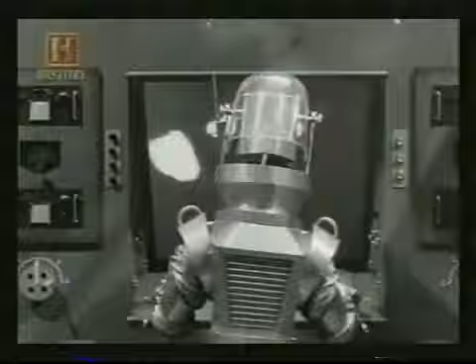Con crear una máquina a su propia imagen, que sea inteligente, fuerte y obediente. Más allá de las ideas fantásticas, se encuentra una sorprendente agilidad y una precisión sin paralelos. Desde las primeras maravillas mecánicas hasta la aterradora ciencia ficción y la sorprendente realidad de nuestros días, esta es la extraordinaria historia de los robots.

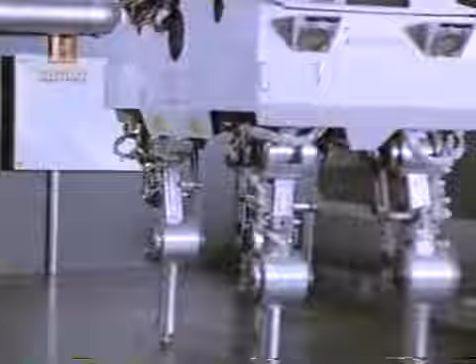Estos son los robots del siglo XX. Magníficas máquinas que han salido de las páginas de la ciencia ficción para adentrarse en nuestras vidas. Actualmente muchos robots trabajan para nosotros. En las fábricas, estos obreros de acero laboran sin descanso y desempeñan tareas de precisión, guiados por sentidos muy desarrollados, como la vista y el tacto.

Otros robots se aventuran valientemente en ambientes hostiles, desempeñando trabajos desagradables, demasiado peligrosos para ser realizados por el hombre. Los robots también son construidos para entretenernos y asombrarnos. Cada vez más se parecen a sus creadores y actúan como ellos.

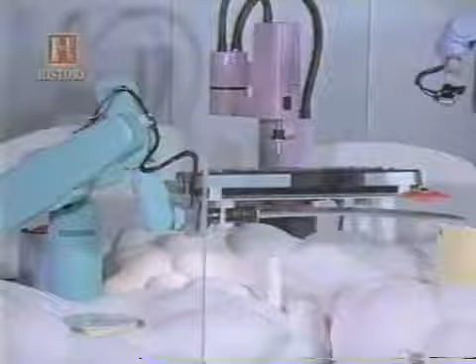A medida que los científicos continúan creando robots más inteligentes y ágiles, se hace más claro que estas inteligentes máquinas tendrán un profundo efecto en nuestro futuro.

Pensamos en los extraordinarios avances en la robótica como un producto de los recientes adelantos en la tecnología y la computación. A pesar de que la palabra no ingresó en nuestro vocabulario sino hasta los años 20, estos robots han estado evolucionando durante miles de años, a medida que el hombre se ha esforzado por crear máquinas a su propia imagen, para trabajar, entretener y para que permanezcan como servidores y no se conviertan en amos.

La primera criatura con aspecto de robot data de hace aproximadamente 5000 años, cuando los sacerdotes manipulaban fraudulentamente estatuas religiosas con movimiento en los labios y tubos parlantes para impresionar a sus asombrados seguidores.

As part of religious practice, going back thousands and thousands of years, there's normally been some kind of oracle, some sort of seer, that gives you predictions about the crops or the weather or whether the king will die. And these figures had to come at you in some sort of secretive, magical way. And the Egyptians did this with an Anubis, which is kind of a wolf-like face with an articulated jaw. The articulated jaw could be manipulated by the priest behind the Anubis, and then the priest could talk through a tube in through the Anubis's mouth.

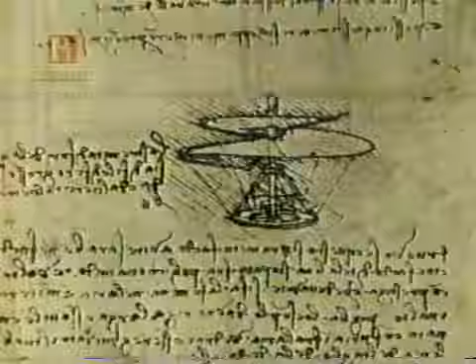En el siglo XVI, Leonardo da Vinci llenó sus libros con principios mecánicos que posibilitaban la creación de autómatas, y dijo haber creado un león mecánico para el rey Luis XII.

En 1580, el rabí Judah Loew creó el legendario Golem para proteger a los judíos de Praga. La historia dice que construyó una figura de barro extraído del río Moldava y le dio vida. Sin embargo, con el tiempo el golem sufrió un ataque de locura y tuvo que ser destruido. Por supuesto, gran parte de la historia es mito, pero el tema se convirtió en elemento permanente durante siglos de los cuentos populares sobre robots.

Para el siglo XVIII, la tecnología de los relojes y cajas musicales había sido perfeccionada, y los inventores y científicos se inspiraron en estas intrincadas máquinas.

It's hard for us to imagine how amazing it was when somebody came up with a clock that could tell time by the minute. And then, what else could a machine do, a mechanical device? And the imagination just went wild.

El artesano suizo Pierre-Jacques Droz y otros utilizaron estas técnicas para construir complejos autómatas que ejecutaban instrumentos musicales y realizaban pinturas. Estas ingeniosas máquinas operaban con levadores de bronce finamente labrados. Con el cambio de los levadores en los dispositivos se alteraban los movimientos del autómata, lo cual dio origen a las primeras máquinas programables.

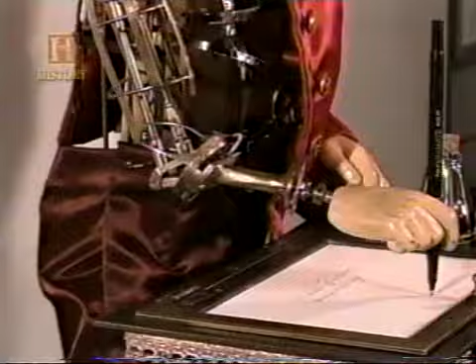This automaton is particularly interesting in that it has the largest vocabulary of any of the machines that survive, and we think the largest one of any that was ever built. It knows how to write 3 poems and can draw 4 pictures.

One of the poems is in English, but 2 of them are in French, because this machine was designed to travel all over Europe to sell tickets to pay for itself.

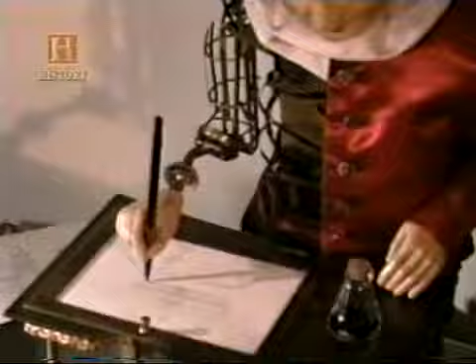When we got the machine rebuilt and started reading out from its program, the last poem that it writes says down at the bottom of the poem, écrit par l'automate de Maillardet, written by Maillardet's automaton.

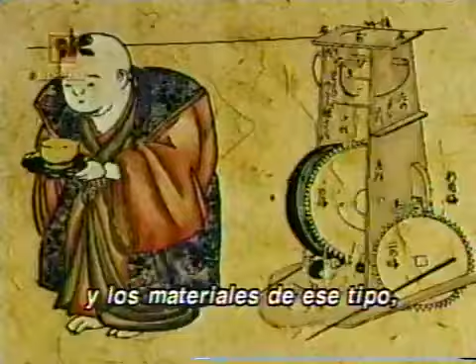What's amazing about the mechanisms is before the Japanese had total control over flexible metals and things of that kind, they made use of bamboo. They made the first walking dolls completely out of bamboo, including the springs. The springs were bamboo springs.

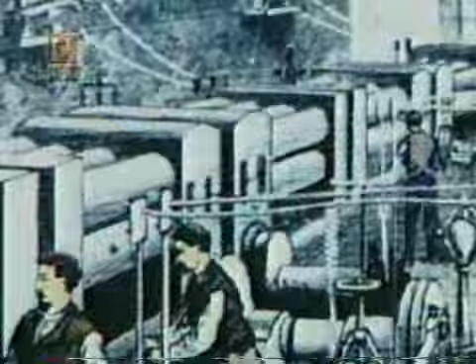Pero esta era la época de la electricidad. El chispazo que trajo el monstruo de Frankenstein a la vida estaba entonces dando vida a autómatas realistas.

En 1876, una banda automática de tamaño real interpretó un número para la entusiasmada audiencia.

Para finales de 1800, Thomas Edison utilizó la tecnología desarrollada para su nuevo fonógrafo con el fin de producir muñecas parlantes que cantaban María tenía un corderillo. El popular invento de Edison puso en marcha una nueva industria de juguetes parlantes.

Entretanto, George Moore exhibía la primera máquina bípeda. Su hombre de hojalata caminaba en círculos impulsado por un motor a vapor de medio caballo de fuerza. La visión de crear robots con forma humana estaba cada vez más cerca de la realidad.

Durante el siglo XX, los escritores y directores cinematográficos de todo el mundo continuaron con el tema de las máquinas fuera de control. En 1920, el director italiano André Deed creó una idea extraordinariamente avanzada para un robot en su film L'uomo meccanico, el hombre mecánico.

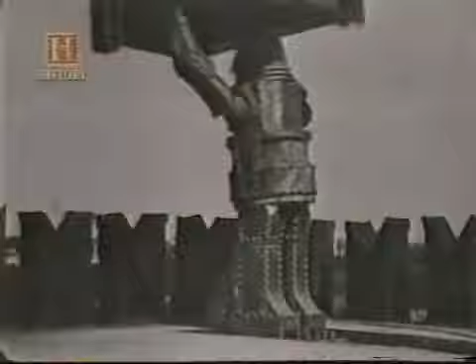1921 trajo otro acontecimiento. El dramaturgo checo Karel Čapek escribió Los robots universales de Rossum, RUR. Este fue el primer uso de la palabra robot, que Čapek derivó de la palabra checa robota.

Robota is the Czech word for extremely hard labor, basically slave labor. The primary characters in RUR were robot workers, machines made to work extremely hard, and the play involved them being exploited mercilessly by the factory owners, and eventually they revolted and destroyed humanity. RUR did set a tone for how the West at least views robots.

Fue entonces cuando en 1926 la película clásica de Fritz Lang, Metrópolis, se convirtió en un éxito internacional al mostrar temas similares a los de RUR.

Metropolis was the 1926 masterpiece by Fritz Lang, which took place in the year 2026, exactly 100 years from when the film was actually made. And you had the beautiful city, all the beautiful people, the beautiful architecture and everything, but really underneath the city you had these oppressed workers who were really responsible for all this lavish lifestyle.

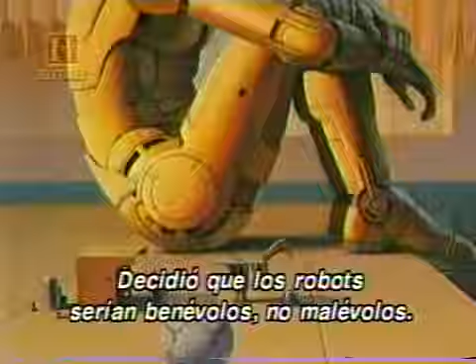They are: 1, a robot may not harm a human being, or through inaction allow a human being to come to harm. 2, a robot must obey orders given it by a human being, except where that would conflict with the first law. 3, a robot must protect its own existence, except where that would conflict with the first and second laws. He decided that robots should be benevolent, not malevolent.

Las máquinas de Asimov dieron origen a nuevos robots en la literatura y las películas de ciencia ficción de principios de los años 50.

This is no offense, but you are a robot, aren't you? That is correct, sir. For your convenience, I am monitored to respond to the name Robbie.

You could really see the 3 laws of robotics demonstrated in Forbidden Planet. And there's this one scene in particular where Morbius tells Robbie to fire a weapon at the commander, and Robbie just freezes, and he has this complete meltdown.

You see, he's helpless, locked in a sub-electronic dilemma between my direct orders and his basic inhibitions against harming rational beings. Cancel.

El Planeta Prohibido hizo de Robbie el Robot una estrella cinematográfica que inspiró a una generación de creadores de robots, a pesar de que fue solo un modelo construido para una película.

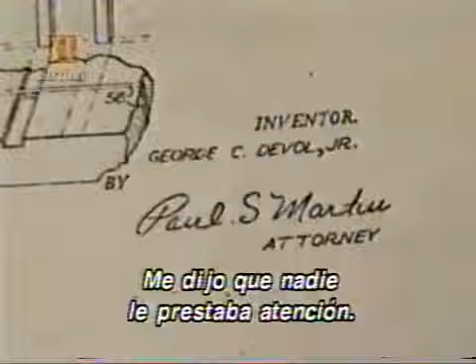We got talking in a corner, and I think we also got into our cups. Talking about it, I said, gee, that sounds like a very good idea. I think the patent makes sense to me. What are you doing with it? And he said, well, no one's paying any attention to me. So I said, let me have a crack at it. Let me see if I can't find the financing. And in the cold gray dawn with a hangover, it still looked like a pretty good idea.

Ambos hombres tenían fe en la idea, pero resultó muy difícil convencer a las empresas para que financiaran el proyecto. When we built the first industrial robot, to get the financing, I visited 46 different companies before I could find someone who believed it was even possible to do such a thing.

A pesar de que llevó años de trabajo y recaudación de fondos, el anteproyecto de George Devol fue llevado a la vida robótica en 1961. La nueva compañía fue llamada Unimation y el robot Unimate.

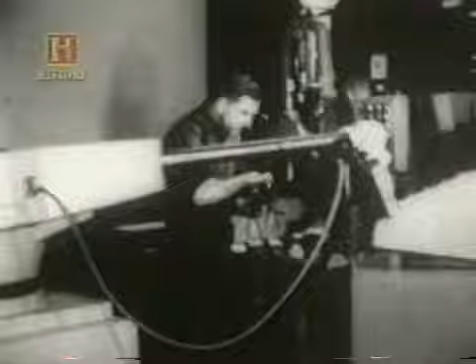Automation's newest contribution to man. This jack-of-all-trades robot is called Unimate, and it handles dull, difficult, or dangerous jobs with equal aplomb.

Ese mismo año, la General Motors adquirió el primer Unimate y lo colocó en una planta de Nueva Jersey para manejar las piezas incandescentes de una máquina de fundición. La automatización no era nueva para la industria automotriz, pero esto era algo diferente. El Unimate creó la definición del robot industrial.

An industrial robot is something that has at least 3 degrees of freedom, which means 3 axes that can move independently. It has to be reprogrammable, and it has to be able to perform different tasks. And that's the universally agreed definition today.

The original Unimate had an awful lot of the major qualities that all industrial robots have today. It had to have a memory. It had to remember up to 100 different steps. There's 100 different things in a row it could do.

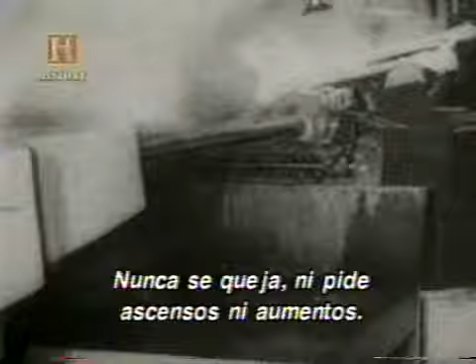He has muscle, can pick up 75 pounds, and can stand extreme heat, cold, noxious odors, toxic gases, and radiation. He never complains, asks for a promotion, or demands a pay raise. He doesn't break, bend, or burn, and should make some other Unimate a perfect husband. Or maybe wife?

Esta era una máquina primitiva que pesaba 1000 kilogramos, impulsada por medios hidráulicos, con la memoria almacenada en una bobina magnética de metal. Su sistema nervioso era operado por retroalimentación o servomecanismos, los cuales miden dónde se encuentra el robot en el espacio. Cuando éste alcanza su punto programado, entonces ejecuta su próxima maniobra.

Otra innovación fue el efector terminal, la mano del robot. Esta es la parte de la máquina que se relaciona con sus alrededores. Cada una es diseñada para realizar un trabajo específico, como soldar, perforar, pintar y asir.

End effector is another word for tooling. Now, the tooling can get pretty sophisticated because some of the tooling has sensors built into the clamp, let's say, that will allow it to exert just so much pressure on something.

Sin embargo, aparte de General Motors, los compradores de los nuevos robots eran escasos. If you don't understand something, and to try to get a normal businessman to understand a robot, he thought you're talking about science fiction or something like that.

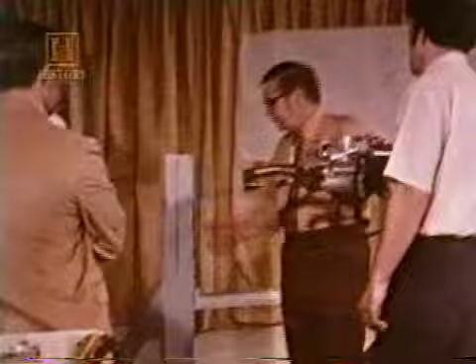Los cuerpos directivos se mostraban escépticos, los compradores temerosos. Los ejecutivos corporativos creían que los robots no funcionarían, mientras que los empleados temían que trabajaran demasiado bien y que los reemplazaran. No obstante, los robots realizaban en especial los trabajos que la gente no quería desempeñar. De hecho, los robots generaron empleo. Era trabajo de humanos diseñarlos, construirlos, operarlos y repararlos.

So they're able to use the kind of brain power that they have. Like one of the people that went to one of our classes learning how to program robots came out of it and said, gee, now I can finally use my brains for this company I've been working for 20 years instead of just my muscles.

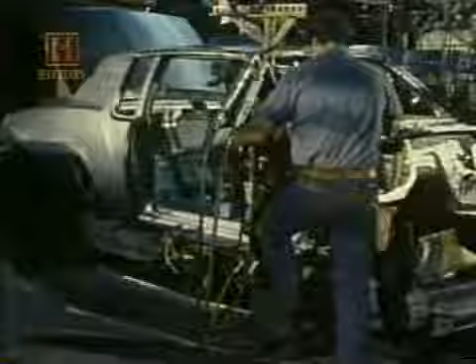Para mediados de los 60, incluso los sindicatos laborales respaldaron a los robots y reconocieron el inevitable incremento en la productividad. Aún así, el Unimate original, con un precio de $18,000, siguió teniendo dificultades de venta. What we did to get people started, we would rent the robot.

You'd hire it like a person. We would say, at that time, it's $6 an hour for the first shift and $3 an hour for the second shift. So your labor gets cheaper. The robot had one advantage immediately: it could work 3 shifts, or work 24 hours a day.

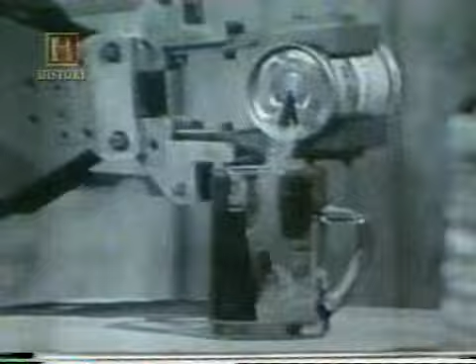And third, it could lead the orchestra. Now, what he's doing now is to program what he's going to have the machine do. He's putting this information into the machine. And that gave me a chance to show how the arm moved with a baton. Take it on the downbeat.

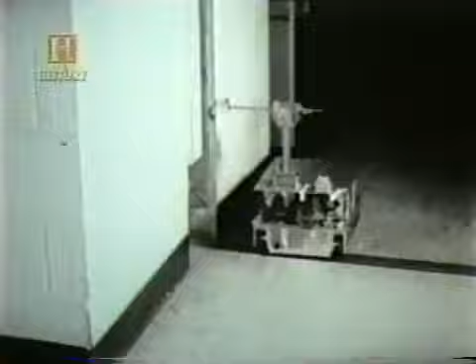The environment in which this vehicle is to live is that of the halls of the Applied Physics Laboratory. There it must cope with the various obstructions around the wall, while seeking out sufficient power outlets from which to keep the battery charged, which are located in the lower part of the body section.

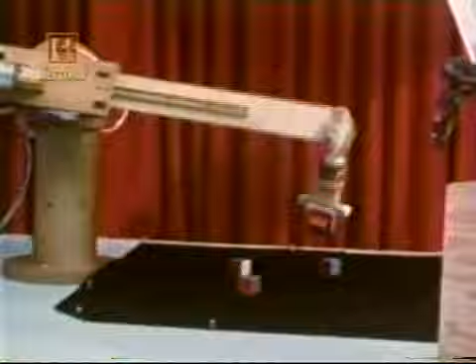In hindsight, of course, it's obvious that those are actually the hard parts, because those are the things that human beings have done as a life or death matter for most of our evolution.

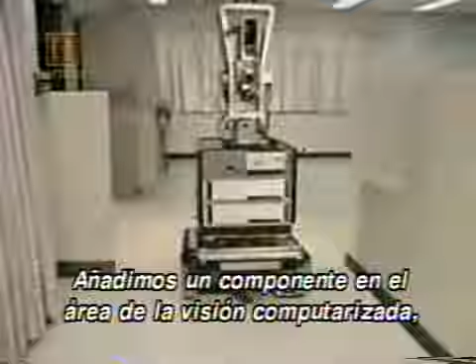And in fact, it worked very well. You could go in and move the boxes while the robot was performing some plan. It would recognize that things were going wrong. It would replan, and it would figure out what to do again. Just a phenomenal idea. We put together a component in the area of computer vision, in the area of planning, and we put these together into a system that functioned smoothly, all as one integrated device. I think that was probably the first time that so many different components, so many different parts of artificial intelligence were put together into one system.

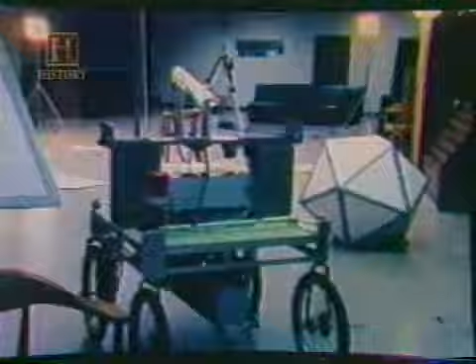La carreta tenía una cámara que tomaba una serie de 9 imágenes, a partir de las cuales medía la distancia de un objeto, utilizando 9 coordenadas separadas.

Su desempeño, sin embargo, aún no era perfecto. Un buen día, en 1979, cruzó un espacio obstruido de 30 metros, aunque le tomó 5 horas hacerlo.

Los investigadores de la IA se desconcertaban constantemente ante la amarga realidad de la tecnología actual. No obstante, los adelantos en el procesamiento de computadoras produjo avances.

Flakey, el hijo de Shakey, fue creado en el SRI a finales de los años 70. Dando vueltas por el SRI como un pariente lejano de Arturito, Flakey incluso podía interpretar pequeñas órdenes de su amo y ejecutar una acción apropiada.

I want Leslie to have the bagel. Enter. I want Leslie to have the bagel. Finished successfully parsing sentence.

El dueño solo dijo que quería que Leslie tuviera una rosquilla. Flakey razonó que debía encontrarla y entregarla.

The idea at that point was that you were trying to make a robot that would essentially be a robotic person. That is, it would have all the capabilities, hopefully, eventually, of a person self-contained within this one box.

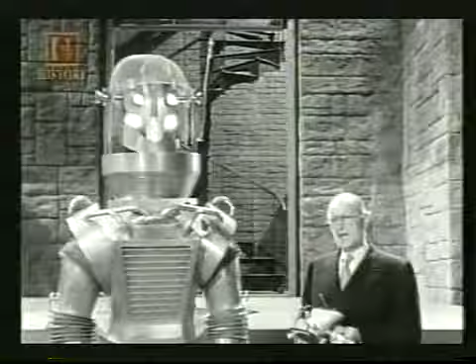A lo largo de los años 50, 60 y 70, la cultura popular se aferró con firmeza a la visión de los robots inteligentes y serviles. Pero la fantasía aún sobrepasaba en mucho a la realidad.

Los hombres mecánicos construidos durante este periodo, como el robot del ingeniero suizo Peter Stern, eran poco más que sofisticados autómatas, parientes cercanos de Electro y Sparko, creados en décadas anteriores. Sin embargo, poco a poco los investigadores perseguían el sueño de un robot que fuera semejante a los humanos.

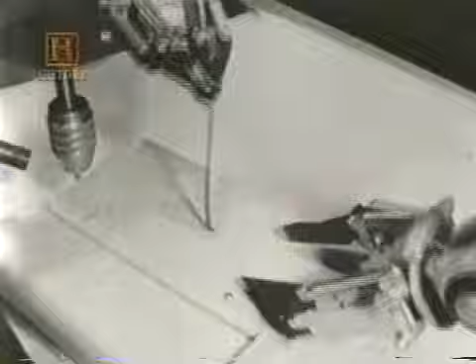En la década de los 50 se crearon brazos mecánicos para manejar isótopos radiactivos. SAM fue construido para la NASA para operar en sitios de pruebas radiactivas y en el espacio exterior.

Pero estas máquinas eran teleoperadas y solo reaccionaban al control humano. Fue entonces cuando los científicos de Stanford y del Instituto Tecnológico de Massachusetts acoplaron esta destreza mecánica a los nuevos avances en inteligencia artificial y sistemas de visión.

Los robots experimentales como la mano de Salisbury dieron a las máquinas un refinado sentido del tacto que les permitía manipular objetos pequeños y delicados.

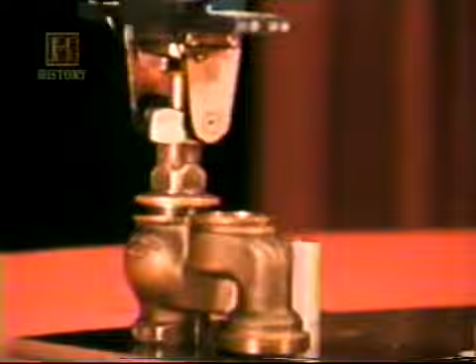A principios de la década de los 70, algunos de los graduados de Stanford reconocieron el potencial de estos adelantos para la industria privada y fundaron una compañía encargada de fabricar y distribuir estos inteligentes brazos de robot.

That company had three people, Vic Scheinman, myself, and Bruce Shimano. The company was called Vicarm, which stood for Vic's arm, and we began to build small electric computer-controlled robots for research purposes. El Vicarm podía moverse con una precisión y seguridad de funcionamiento sin precedentes y era capaz de repetir un movimiento con asombrosa precisión.

Los socios deseaban llevar su invento al mercado industrial y darle al Unimate un cerebro.

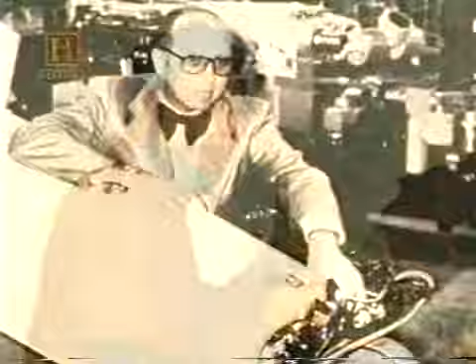Fue entonces cuando, al igual que Joe Engelberger, Vic Scheinman llevó su espectáculo robótico de un lado a otro. Irónicamente, Engelberger lo encontró en la puerta de una exhibición comercial en Chicago en 1975.

All of a sudden there was this commotion out on the steps, and we asked security to go out there and see what was going on. Well, Vic Scheinman was out there with a briefcase. He'd open up his briefcase and this little robot arm would move around. So we threw him out of the trade show 2 or 3 times. And he was standing out in front of the show with a robot under his arm, and it was like a Frenchman selling filthy pictures, you know. And I said, come on in, Vic, and we'll put a table up at the corner of our booth, and you can start showing people.

Unimation estaba tan impresionada que compró la compañía Vicarm. La General Motors luego los comisionó para crear un nuevo robot que funcionaría en las líneas de ensamblaje automotriz. Juntos construyeron un robot que estableció un estándar en la industria, el Puma, o máquina universal programable para el ensamblaje.

The Puma was an industrial version of the Vicarm technology. It had incorporated into its base an LSI-11 computer, a small microcomputer. It could move to a repeatability of 0.004 of an inch, which is about the thickness of a sheet of paper. That early computer had only 8 kilobytes of memory in it.

A diferencia del macizo Unimate, controlado hidráulicamente, el Puma era un pequeño robot eléctrico.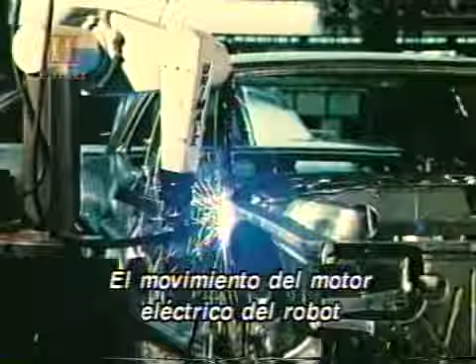The movement to an electric motor to help drive the robots really was a key point, and that was a benchmark time, and it created a lot of new application interest areas and expanded the industry quite dramatically, going from hydraulics to electric. Originally, the Puma was sized to be about the same size as a person, and the idea was that it would be very difficult to get the workforce and the plants to accept this kind of technology, and if it was sized about the size of a human, you could imagine using some places where robots would perform the work or other places where people could perform the work, and if there were problems, you could backfill that technology with people.

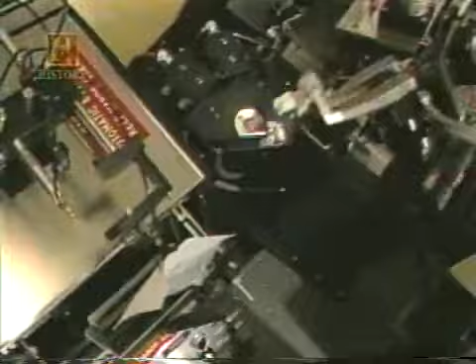Las ventas de Puma rápidamente se incrementaron alrededor de $35 millones al año y dieron origen a una floreciente industria de robots industriales inteligentes.

Pronto los sistemas de visión fueron mejorados, lo cual le permitía a los robots reconocer y manipular partes colocadas aleatoriamente en una correa transportadora móvil. A los robots se les enseñaba esta extraordinaria tarea mostrando primero las piezas al lente de la cámara de video de la máquina. La computadora memorizaba esa forma y buscaba una pareja a medida que las partes descendían por la correa transportadora. Para entonces, los robots habían alcanzado una inteligencia equivalente a la de un grillo.

One application in the mid-'80s was in the food industry, where robots were picking up candy that was coming down a moving conveyor belt, or cookies that were coming down a moving conveyor belt, using machine vision to find the candy or the cookie, then picking it up and putting it into an appropriate package.

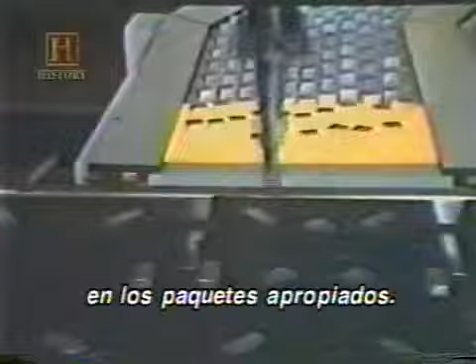Durante ese periodo, la General Motors adquirió casi la mitad de los robots industriales fabricados en Estados Unidos y decidió formar su propia división de robótica.

Westinghouse también entró en el juego y compró a Unimation. Carlisle y Shimano no estaban interesados en convertirse en una especie corporativa convencional, por lo que formaron su propia compañía llamada Adept.

Adept se especializó en mejorar la visión de las máquinas e incorporaron una nueva tecnología mecánica denominada brazos robóticos de conducción directa. Los brazos de los robots más antiguos tenían grandes motores localizados en la base de la máquina y sistemas de alambres, poleas y engranajes para controlar las articulaciones. El funcionamiento de estos brazos les impedía ejecutar movimientos precisos.

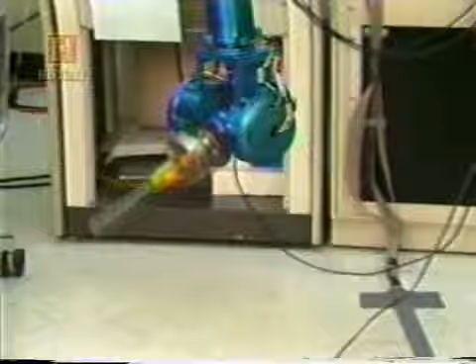Sin embargo, el brazo de conducción directa poseía pequeños pero potentes motores eléctricos en cada articulación del brazo. Motores que generaban gran torsión. Creados originalmente en la Universidad de Carnegie Mellon por Takeo Kanade, los brazos de conducción directa representaron un gigantesco paso en términos de velocidad, calidad de funcionamiento y precisión. La repetición de los movimientos fue reducida a aproximadamente un tercio del espesor de una hoja de papel.

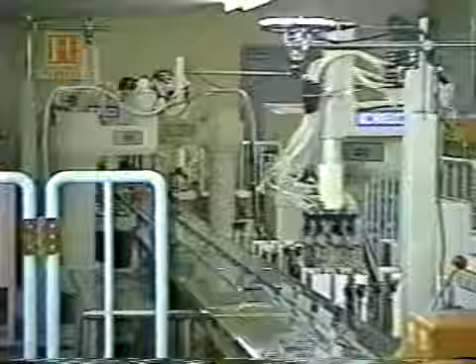Actualmente, Adept es una de las pocas compañías norteamericanas de robots industriales con éxito. General Motors y Westinghouse se han retirado, y la industria es dominada por las compañías japonesas, donde el mercado de robots es 5 veces más grande que en Norteamérica. Las compañías japonesas tales como Fanuc Robotics tienen sucursales alrededor del mundo. Y a pesar de que estas compañías no inventaron los robots industriales, han añadido altos niveles de eficiencia a la tecnología.

They saw something good. They don't worry about whether it was invented there or not. They figure out how to use it most effectively for their objectives. Their most recent motor factory has 200 robots and 40 operators in the plant, and is capable of running overnight, unmanned, actually for a full 3 to 4 day weekend.

En los cuarteles generales de Fanuc hay incluso robots construyendo otros robots. Los japoneses han convertido al otrora desmañado robot en una diestra herramienta increíblemente similar a una extremidad humana.

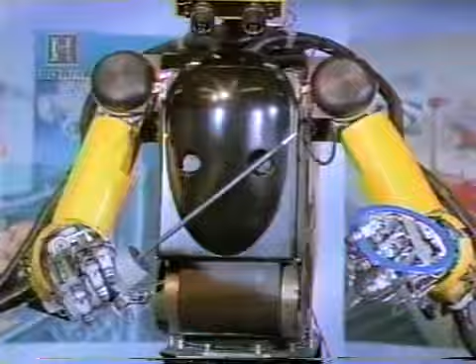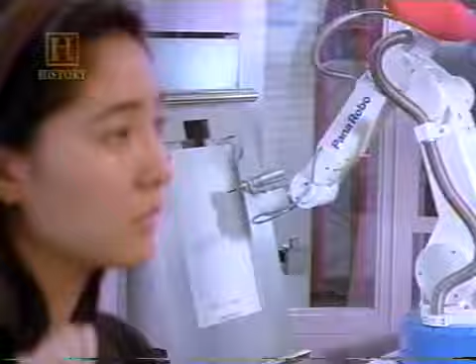Ellos muestran orgullosamente las capacidades de sus máquinas en impresionantes exhibiciones. Robots balanceando peonzas en el filo de una espada. O coordinando 2 brazos en una exhibición de arreglos florales. O los ágiles dedos de un robot manipulando un pequeño tornillo o incluso un brazo de robot utilizando su sistema de visión para dibujar retratos extraordinariamente exactos. La boina es opcional.

El siguiente reto era trasladar a los robots del taller de manufactura al espacio exterior. Para finales de los 70, los robots se habían convertido en elementos permanentes dentro de laboratorios y talleres de manufactura. Sin embargo, estos eran ambientes controlados, lo cual no determinaba con precisión si los robots podían asumir los retos del mundo real.

En la Universidad de Carnegie Mellon, en Pittsburgh, los científicos abordaron el complejo problema que significaba programar los robots para sentir, planificar y pensar en el mundo real. La mayoría de los fondos para la robótica estuvieron destinados hacia la investigación básica dirigida a resolver los problemas teóricos. Pero todo esto estaba a punto de cambiar.

En una pequeña comunidad agrícola, a menos de 320 kilómetros de Carnegie Mellon, el núcleo del reactor número 2 de las instalaciones nucleares de la isla de las 3 millas sufrió una fusión casi catastrófica. Los sedimentos contaminados y los niveles desconocidos de radiactividad convirtieron cualquier exploración humana en potencialmente mortal.

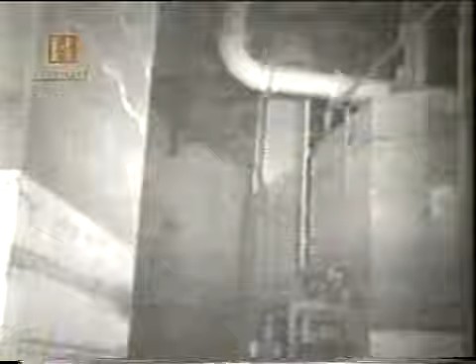La isla de las 3 millas acudió a Carnegie Mellon por ayuda, lo que dio origen a la industria de los robots de campo. 3 Mile Island was a galvanizing event in our personal history. It was the opportunity to take machines full term, not just ideas and laboratory curiosities, but full up working machines that would go into that accident and perform serious work.

El primer robot en ingresar al área de desastre fue el vehículo de reconocimiento remoto o VRR. El robot de 6 ruedas portaba 2 cámaras a bordo, sensores infrarrojos y de radiación y un conjunto de equipos fotográficos. El VRR fue fabricado con suficiente estabilidad para que no se volcara sobre el pozo de residuos tóxicos y con las dimensiones que le permitieran cruzar por las puertas existentes en el núcleo del reactor.

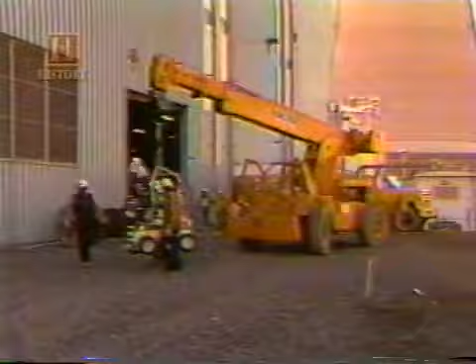Fue entonces cuando en noviembre de 1984 el VRR realizó una riesgosa incursión en la zona de peligro de la isla de las 3 millas.

When the reconnaissance vehicle went into the containment building for the first time was high drama. We were able to view the surroundings, the conditions, the flooding, the damage. But more importantly, an event frozen in time where lunchboxes and watches and ladders were just abandoned as people left. And it was truly special since this machine was the first thing to have gone in, and to this day, the only thing to have gone into the basement.

Los científicos sabían que uno de los aspectos más importantes al enviar un robot a la zona de fusión era traerlo de regreso. De otra manera, solo hubieran añadido varias toneladas de desechos nucleares al problema.

Por esta razón, el VRR era capaz de trasladarse de regreso a un elevador, acoplarse a un gancho y ser levantado hacia un área segura por encima de los sedimentos tóxicos. Asimismo, se añadió una correa de gran resistencia para establecer comunicación continua y, de ser necesario, para funcionar como un plan de escape.

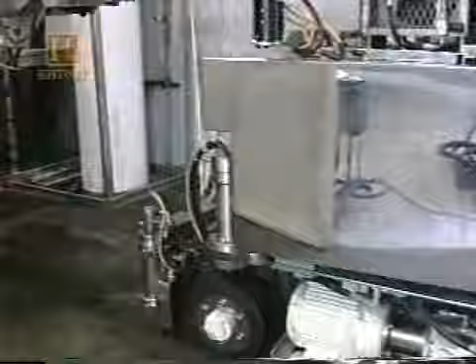Luego se creó un gigante de 5.000 kilos conocido como el caballo de trabajo, cuya tarea era desmontar las áreas contaminadas. Este poderoso robot tenía la habilidad de asir, cortar y alcanzar alturas de más de 9 metros. A pesar de que nunca fue puesto a funcionar en la isla de las 3 millas, el caballo de trabajo fue parte de lo que Whittaker comprendió era un mercado emergente para sus robots de campo: la realización de trabajos demasiado peligrosos para los humanos.

In the earliest going, before the existence of field robots, there were no research contracts. We created opportunities from hazard and operated as technical ambulance chasers. Una nueva industria había nacido.

Pero aún así, estas máquinas lucían y actuaban de un modo bastante alejado a las concepciones populares de los avispados robots humanoides. A friend of mine came to visit, and I took her on a tour, and she walked around and she said, well, nothing has a head. She really wanted to see a face and arms and the whole bit on the robotics, and was kind of surprised when they look like trucks and they look like tractors and they look like Jeeps.

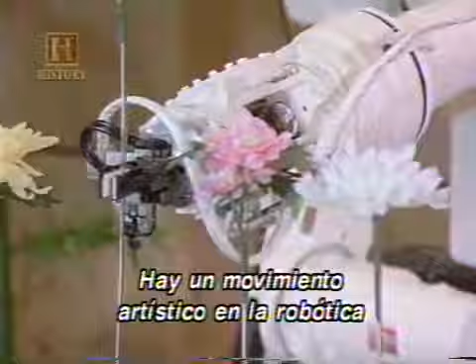I think there's a certain artistic movement in robotics to build some human-like robotics. And certainly the ultimate in robotics would be duplicating a human. In our work, that's not necessary. We think humans can do good human things, and our machines are designed to assist rather than replace the human individual.

En 1988, Whittaker fundó una compañía llamada Red Zone, Zona Roja, para construir robots destinados a realizar labores peligrosas. Los diseñadores de Red Zone programaban los robots para desempeñar tareas específicas, y las máquinas usualmente tomaban formas inusuales.

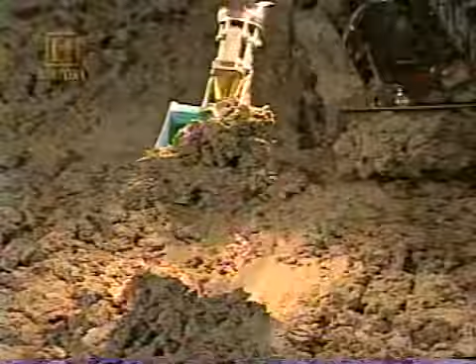For robots that will work inside tanks, inside pipes, inside mines and caves, there are two approaches. One is to forcefully make openings large enough to enter. The other is to collapse, become small enough to go through existing openings.

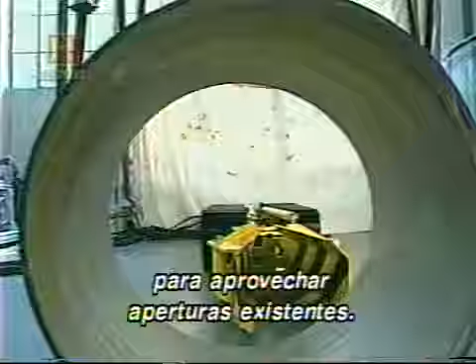This particular robot folds like a parallelogram, so it can go down a 22-inch diameter opening, typical of the kind left in a lot of these nuclear waste tanks. So as the bulldozer folds, it goes down in the tank, opens back up, and then it can move waste around in the tank to the clean-out sumps and so forth.

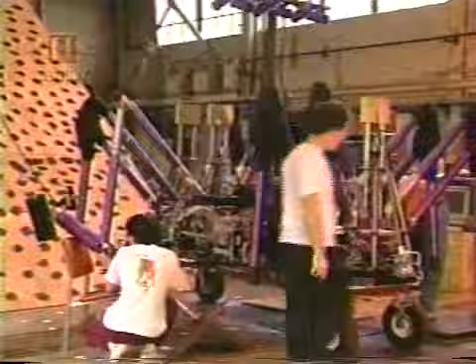Antes de emprender el viaje de 21.000 kilómetros hasta el continente blanco, el robot fue sometido a rigurosas pruebas en una fábrica de acero abandonada en Pittsburgh.

We deployed Dante onto the volcano in thousands of little pieces and parts, with 250,000 lines of fresh software, new sensors, new physical form. In tents at 10,000 feet, we assembled it piece by piece, downloaded software, brought it to life. I was amazed this thing walked.

Al final fue el frío y no el calor lo que aniquiló a Dante. El cableado y los circuitos creados para resistir el calor extremo de un volcán activo fueron incapaces de sobrevivir al frío severo que reinaba en la cima de la montaña. Dante fracasó después de solo 3 pasos.

Los fabricantes de Dante regresaron a la mesa de dibujo y rediseñaron su creación. Nuevas configuraciones de las piernas, colocación de las articulaciones y nuevos metales hicieron que las piernas de Dante 2 fueran 3 veces más fuertes que las de su predecesor.

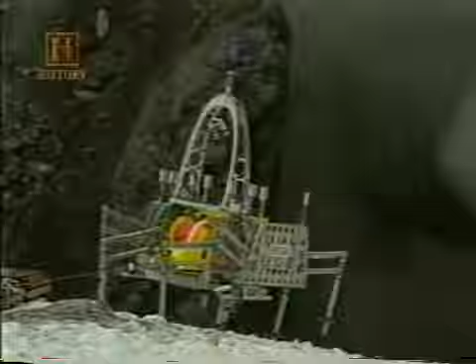Dante 2 fue enviado al Monte Spurr, un volcán en Alaska. Paso a paso transitó por el terreno desmenuzado y soportó una andanada de rocas que caían a medida que hacía su descenso.

Los sensores de Dante permitieron a los investigadores realizar lecturas sísmicas, observar imágenes de video e incluso oler el contenido químico del aire. Todo desde el puesto de comando en Anchorage, a más de 300 kilómetros.

Finalmente, las dificultades del terreno y los fuertes vientos se combinaron para vencer a Dante 2, robot que, por razones de seguridad, tuvo que ser rescatado por un helicóptero.

Red Whittaker y su equipo de robots de campo habían ayudado a construir una industria de robots que nos asistían cuando nuestra propia tecnología nos fallaba. Ellos habían examinado reactores nucleares y volcanes peligrosos. Sin embargo, otros científicos están tratando con un asunto aún más problemático: el tráfico en las horas de mayor afluencia.

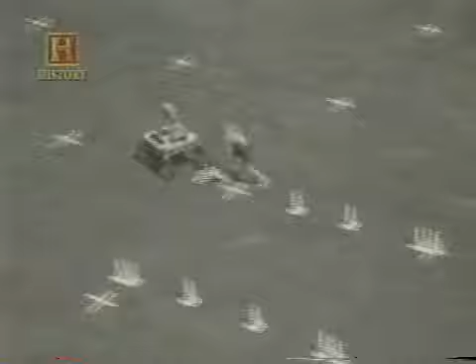Como un infante aprendiendo a caminar, los primeros pasos de los robots han sido poco diestros. No obstante, al igual que un adolescente aprendiendo a conducir, la verdadera libertad solo llegará cuando los robots puedan recorrer largas distancias por sí mismos. En 1979, Hans Moravec trajo los conocimientos desde su centro de operaciones en Stanford hasta Pittsburgh y se unió al equipo de la Universidad de Carnegie Mellon para crear robots móviles.

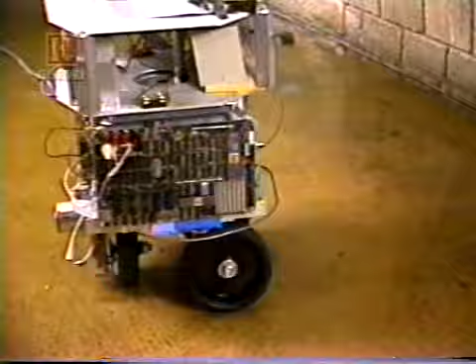Los investigadores de Carnegie Mellon habían estado trabajando en su propio proyecto denominado la Plataforma Móvil Inteligente, o IMP. Este navegante de pasadizos tomó prestada la tecnología autoenfocable de sonar de las cámaras Polaroid para delinear su mundo. Exploraba su ambiente como lo haría un faro, pero el sonar demostró tener severas limitaciones.

It can't see very far away. It has a problem if you have a smooth surface — the sonar just hits the smooth surface and bounces and never comes back. And so you may think that there's nothing there when in fact there's a nice smooth wall.

El próximo proyecto de Moravec con el equipo de Carnegie Mellon llamado Urano utilizó ruedas especialmente diseñadas para solventar algunos problemas técnicos. Uranus exhibits that unique ability to move instantaneously in all directions, not just like we drive a car, but also to move laterally, spin on a dime, or to pirouette so it could turn while moving.

And we couldn't solve the parallel parking problem, so we made machines that could move like chess pieces that could execute the kind of simple plans and models that we could create.

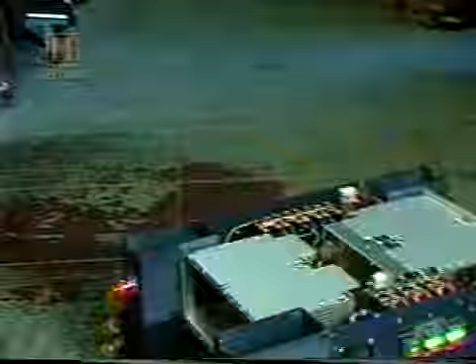Con el advenimiento de los microcomputadores a mediados de los 80, los científicos soñaban con crear finalmente un robot móvil completamente autónomo. Pero incluso utilizando la tecnología más moderna, se requería de un vehículo especialmente equipado de nombre NavLab 1.

El vehículo del robot necesitaba un motor separado de 4 cilindros para impulsar 4 estaciones de trabajo computarizado, una supercomputadora, sus sistemas de visión y un acondicionador de aire. Los estudiantes se sentaron en la retaguardia para controlar el equipo, pero el gran vehículo se estaba conduciendo a sí mismo.

Al principio, pocas personas creían que el NavLab podía viajar a más de 8 kilómetros por hora para luego detenerse. The NavLab 1 typically ran at about a walking speed.

In fact, my son was born at the same time that we built the NavLab 1, and we had a contest — when he was crawling, it was moving at a crawling speed. When he learned how to walk, it was moving at a walking speed. When he learned how to run, it was moving at about a running speed. He finally got a bicycle, and then the NavLab 1 was moving at about the speed he could ride his bicycle.

Si bien el NavLab finalmente excedió los 32 kilómetros por hora, los niños en bicicleta fueron justamente el tipo de objeto que su sistema de visión tuvo dificultades para manejar. El NavLab estaba equipado con cámaras de video estéreo y un visor de rango láser, y aún así tenía grandes dificultades descifrando los cambios en el terreno.

Los NavLabs más recientes han alcanzado un punto en el que las diferencias entre robot y automóvil prácticamente han desaparecido. Las computadoras, radares y cámaras ahora son virtualmente indetectables. Y eso, según Chuck Thorpe, es lo más importante.

Oh, if you take it to show it to my son's 6th grade class, they're disappointed because it doesn't look so impressive. But that's really the idea, that computers are disappearing, the robotic stuff is disappearing. It's more and more a comfortable environment that just feels like a car, a very smart car that can help you drive, but very much a familiar environment to be driving.

La misma tecnología del NavLab también ha sido empleada por otras industrias como las excavaciones y la agricultura. Algunos tractores ahora pueden distinguir entre cosechas cortadas y las que aún no lo están, y arar campos completos sin un operador.

Y algún día no muy lejano, helicópteros automáticos serán capaces de realizar operaciones de búsqueda y rescate con mayor eficiencia que los humanos.

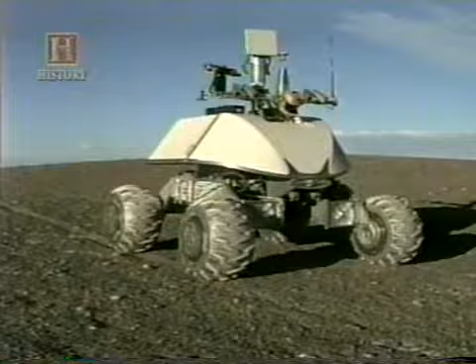Nomad fue diseñado para operar de manera autónoma durante largos periodos, transitar por terrenos desconocidos e identificar meteoritos y otras muestras de roca. El vehículo trazó su propia trayectoria en la mayor parte de sus 6 semanas en el desierto.

Las instrucciones que recibía generalmente provenían de salones de clase de todo el mundo, los cuales fueron proveídos para comunicarse con el robot.

Nomad estaba capacitado para operar de manera similar al Pathfinder de la NASA, diseñado por el Laboratorio de Propulsión a Chorro.

Pathfinder envió sorprendentes imágenes del planeta rojo y estimuló el interés de la nueva generación en las exploraciones espaciales y los robots.

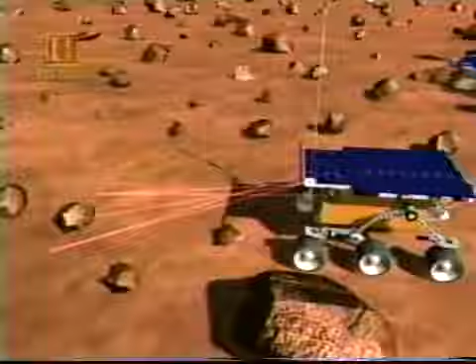La evolución de los robots los transformó de experimentos primitivos en máquinas extraordinariamente capacitadas. Los robots modernos fácilmente alcanzan y superan cualquier definición de libro de texto. Son programables y pueden llevar a cabo diferentes tareas.

Pueden funcionar de manera autónoma e interactuar con su ambiente. Actualmente, aún los robots de juguete son más complejos y funcionales que los robots más avanzados de hace 50 años.

Pero pese a lo impresionante que pueden llegar a ser, hay un elemento faltante, y es que la mayoría de los robots exitosos no lucen como los robots de nuestras fantasías.

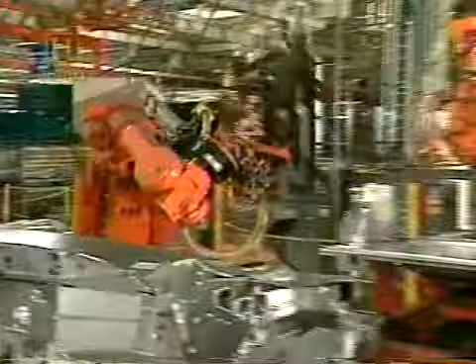¿Qué sucedió con nuestro sueño de hace cientos de años? El de crear una máquina a nuestra propia imagen que fuera nuestro obediente servidor.

The ultimate in do-it-yourself project from the home workshop of 16-year-old Kurt Golden, Arthur the Robot.

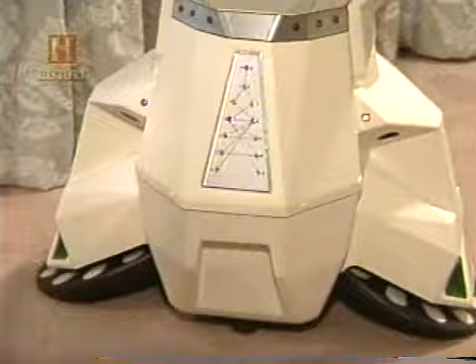Bob was the Cadillac, the starship. This was meant to be the be-all and end-all robot. Brains on board is what it stood for. It had multiple processors, a cool operating system, and sensored to the hilt.

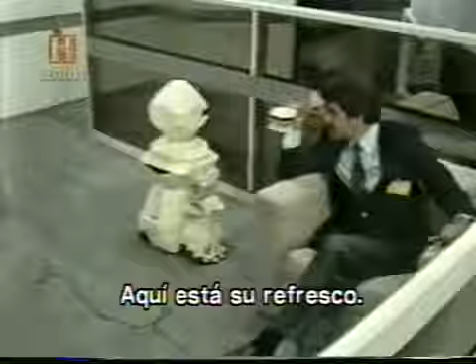Very good, Bob. Thank you, pal.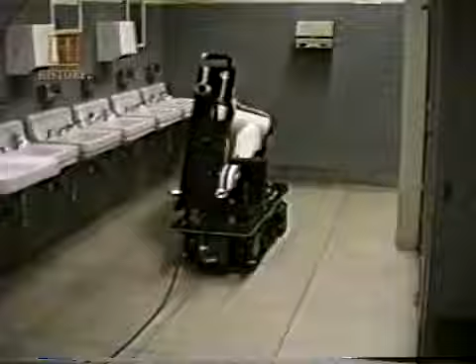Certainly in less than 50 years, there will be household robots just as likely as Cadillacs. Probably not as likely as Chevrolets.

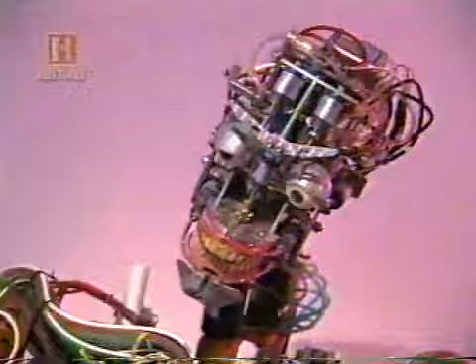I think I know now what they mean by the expression, if looks could kill.